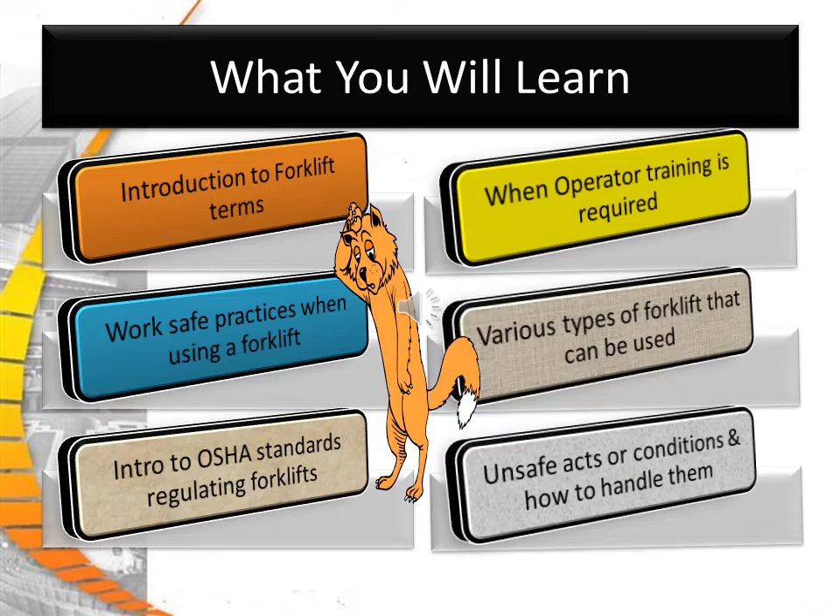Part 1, Introduction to Forklift Safety.

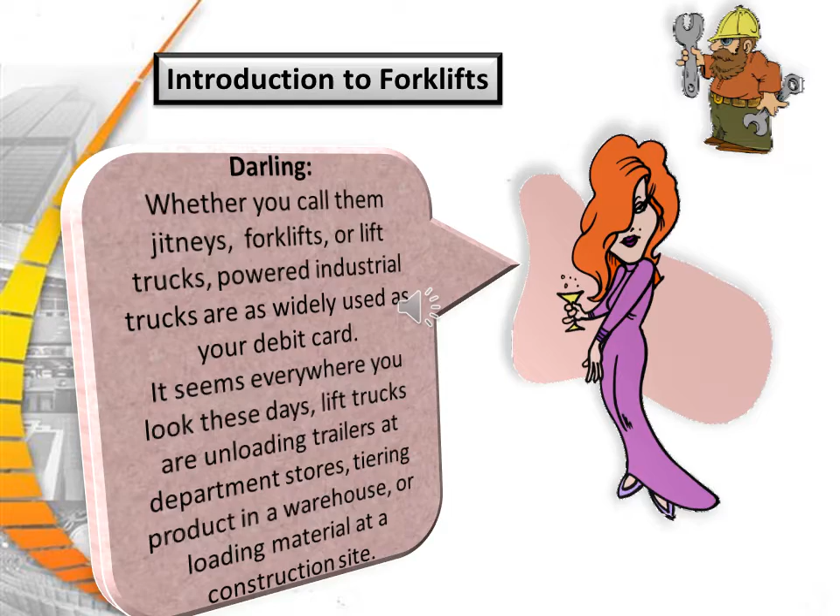Whether you want to call them jitneys, forklifts, lift trucks, or powered industrial trucks, they are as widely used as your debit card. It seems they're everywhere you look these days. Lift trucks are unloading trailers at department stores, tiering product at warehouses, or loading up material at construction sites. Powered industrial trucks are also moving lumber in a sawmill and dropping stock in a grocery store aisle. With well over 1 million trucks in operation today, the emphasis must be placed on both worker and pedestrian safety.

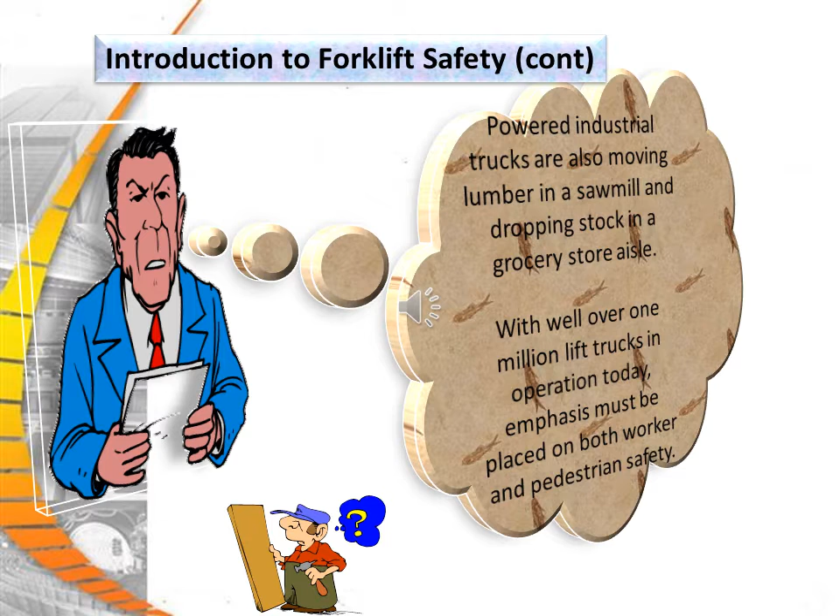This program will help you understand OSHA safety and health regulations governing these pieces of equipment, in addition to providing you with assistance in developing a training program for your lift truck operators, as well as other affected employees.

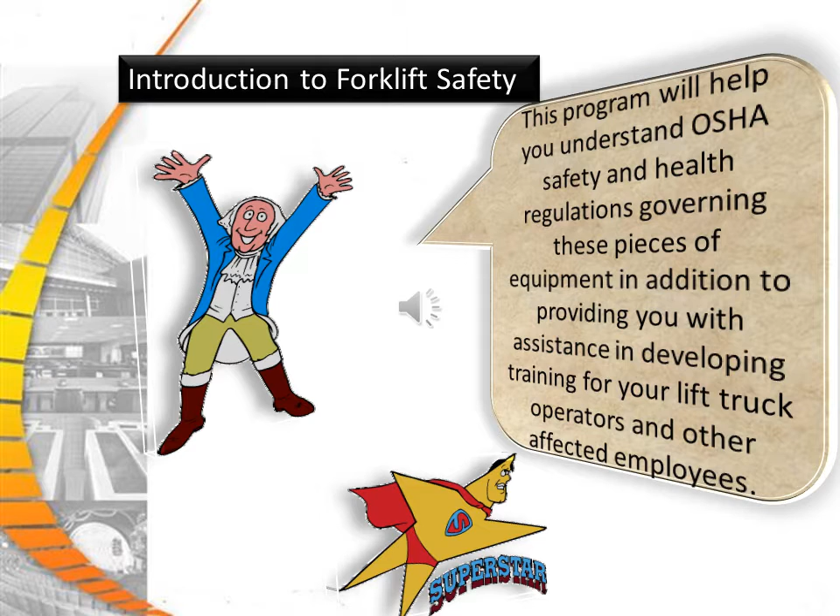What are the objectives of this program? Here they are: review OSHA Subpart N 29 CFR 1910.178 for powered industrial trucks, and discuss the fundamental safe work practices for the operation of powered industrial trucks.

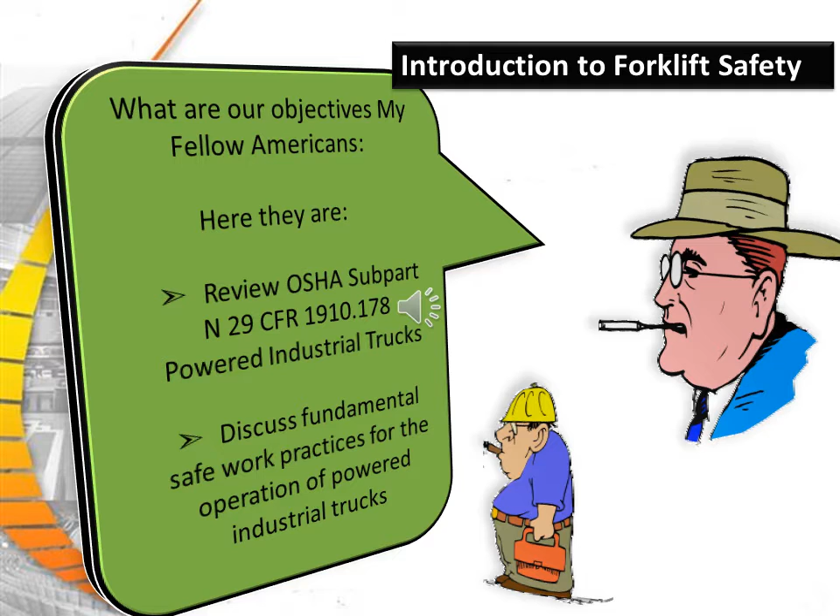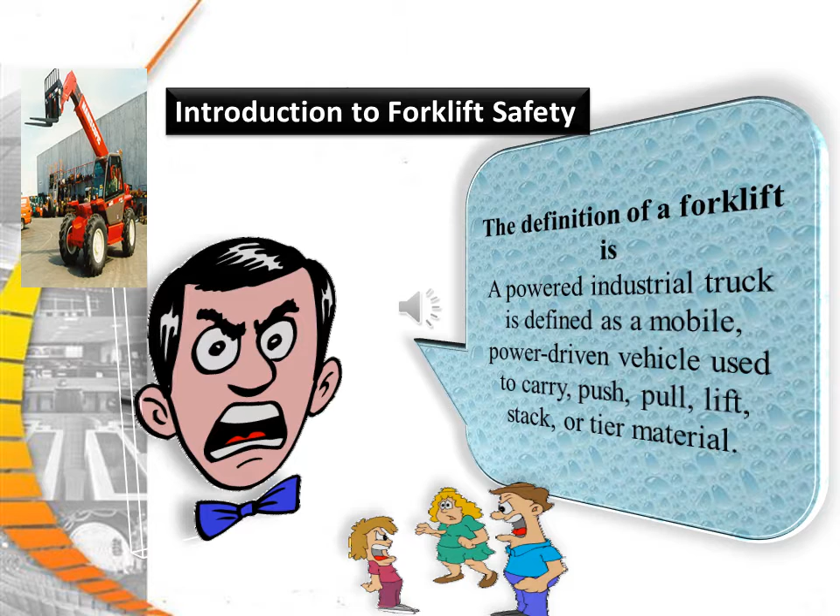The definition of a forklift is a powered industrial truck, a mobile, power-driven vehicle used to carry, push, pull, lift, stack, or tier material. Vehicles not covered by the powered industrial standard are compressed air or non-flammable compressed gas operated industrial trucks, farm vehicles, and vehicles intended primarily for earth moving or over-the-road hauling.

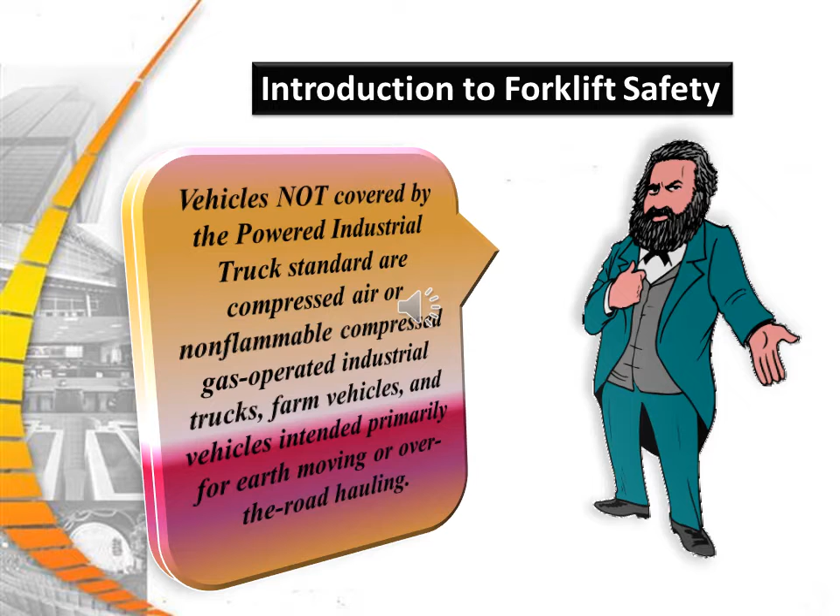Part 2, OSHA forklift requirements.

Design and construction of powered industrial trucks must be done in compliance with ANSI, the American National Standards Institute, B56.1. B56.1, 1993, is a safety standard for low-lift and high-lift trucks, and is in its latest revision.

All nameplates and markings must be in place and readable under the standard.

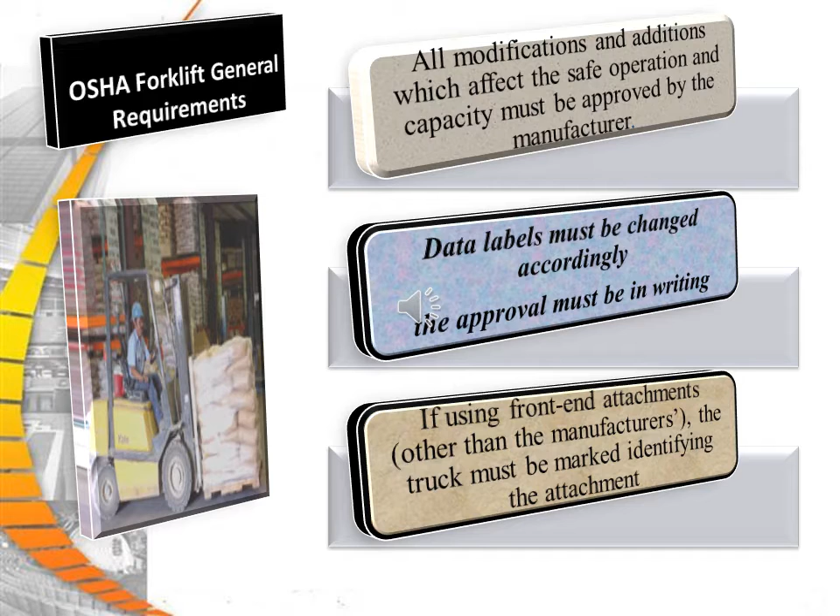All modifications and additions which affect the safe operation and capacity must be approved by the manufacturer. Data labels must be changed accordingly, and this approval must be in writing from the manufacturer. If using front-end attachments other than the manufacturer's, the truck must be marked identifying the attachment, listing the approximate combined weight of the truck and attachment at the maximum elevation with a centered load.

Most vertical mast forklifts are equipped with FOPS, falling object protective structures.

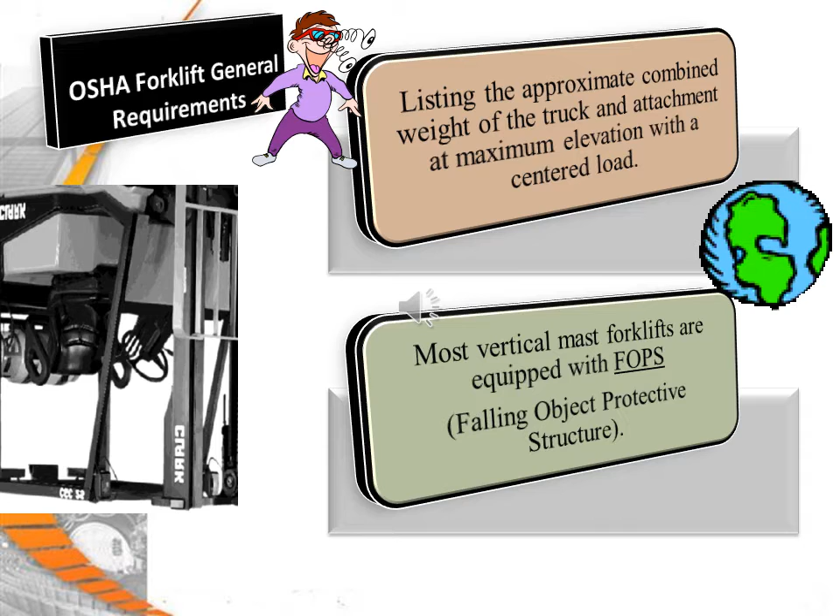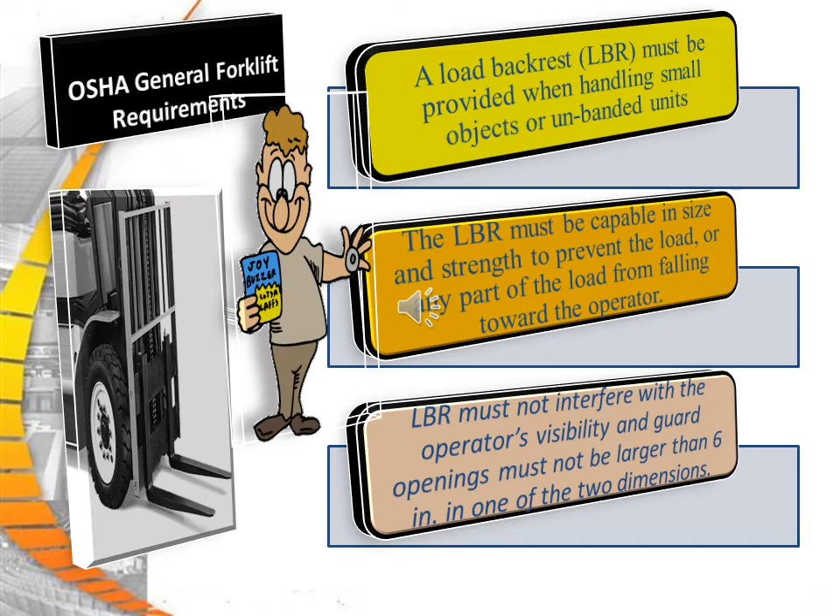A load backrest, or LBR, must be provided when handling small objects or unbanded units. The LBR must be capable in size and strength to prevent the load or any part of the load from falling toward the operator. The LBR must not interfere with the operator's visibility and guard openings, and must not be larger than 6 inches in either of the 2 dimensions.

Part 3, Forklift Safety and Stability Issues.

The lift truck is based on the principle of 2 weights balanced on opposite sides of a pivot point. The forward wheels are the fulcrum. This is the same principle used for the teeter-totter.

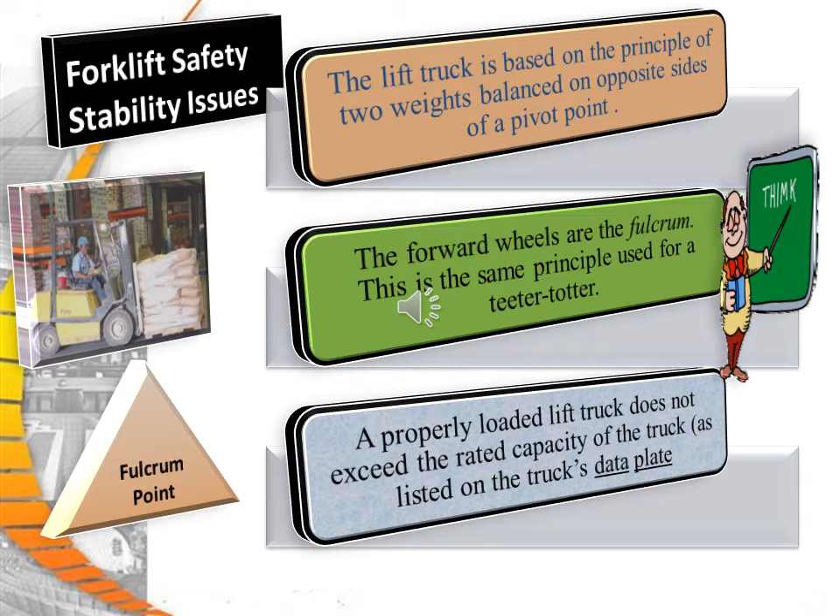A properly loaded lift truck does not exceed the rated capacity of the truck listed on the truck's data plate. The center of gravity, or CG, of any object is a single point about which the object is balanced in all directions. Every object has a CG.

The lift truck has moving parts and therefore has a CG that moves. The CG moves forward and back as the upright is tilted forward and back. And as you can see, the CG will move up and down as the upright moves up and down.

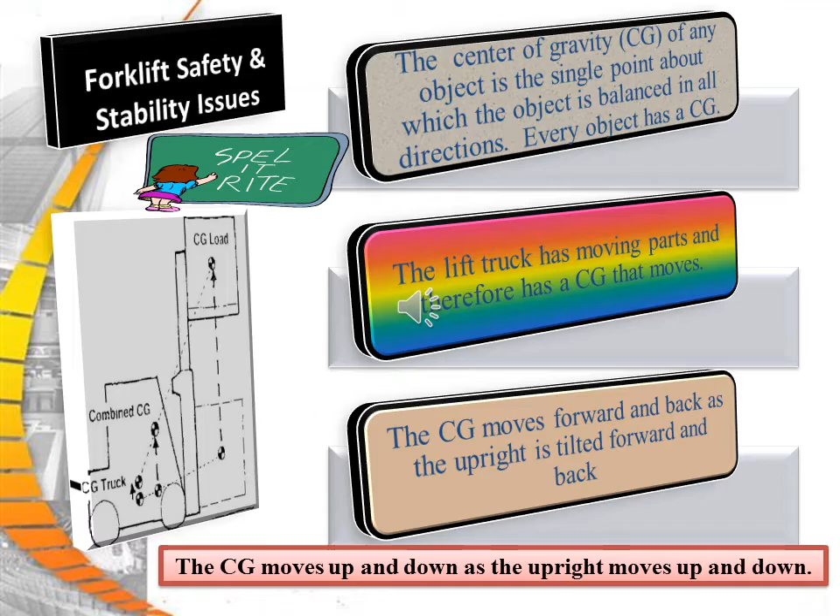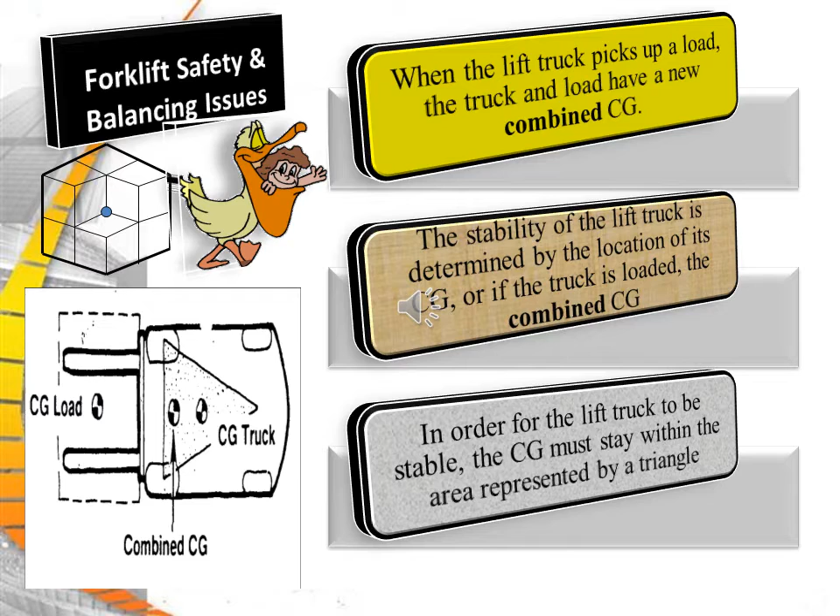A triangle is drawn between the drive wheels and the pivot of the steering axle. This triangle is routinely called the stability triangle. Think of riding a tricycle around corners - you lean forward and you will overturn as you move your CG to the nearest part of the triangle.

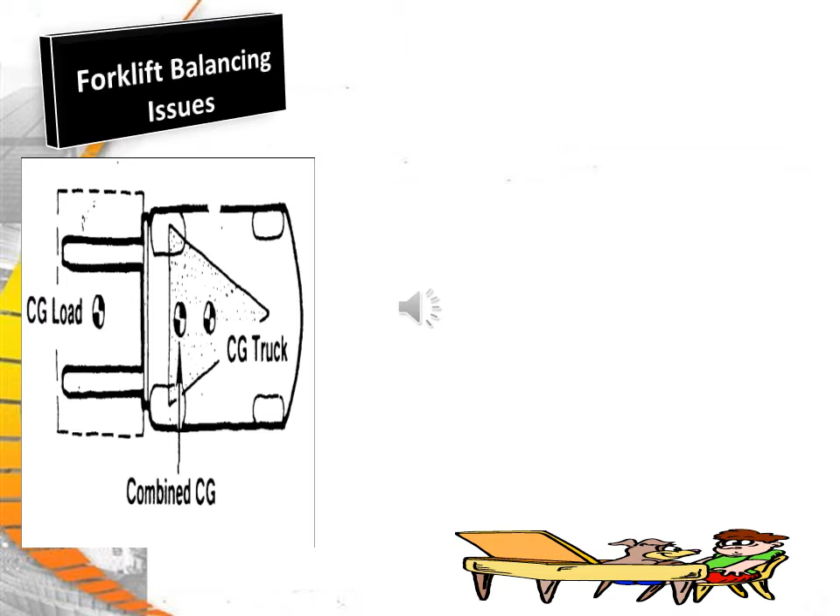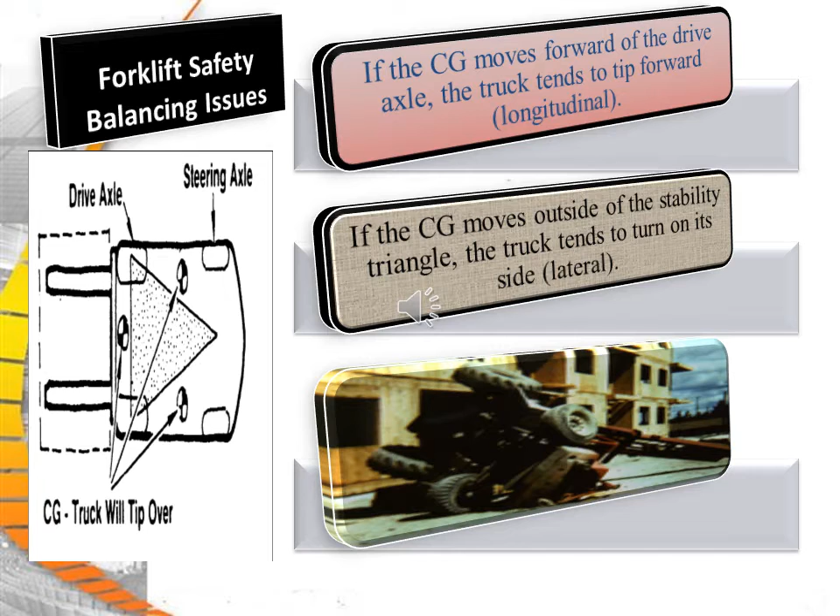If the CG moves forward of the drive axle, the truck tends to tip forward, longitudinally. If the CG moves outside the stability triangle, the truck tends to turn on its side, laterally.

The stability of the loaded truck is affected by a number of factors, including size, weight, shape, and position of the load, the height to which the load is elevated, the amount of forward or backward tilt, tire pressure, and dynamic forces created when the truck is moving. Those dynamic forces are caused by things like acceleration, braking, operating on uneven surfaces or inclines, or turning.

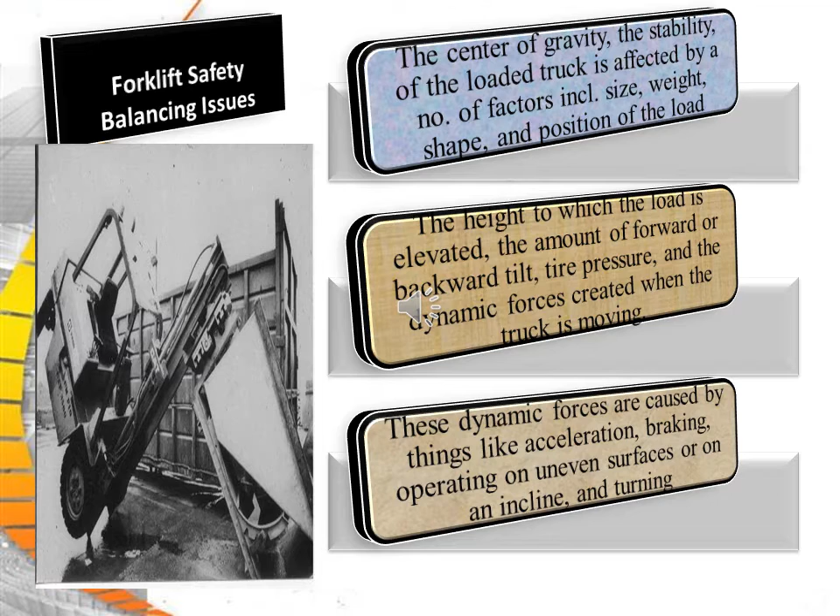These factors must be considered when traveling with an unloaded truck as well. An unloaded truck will tip over the side more easily than a loaded truck with its load in a lowered position. A recent test was done at a lift truck manufacturer's technical center involving a 5,000-pound capacity unloaded lift truck.

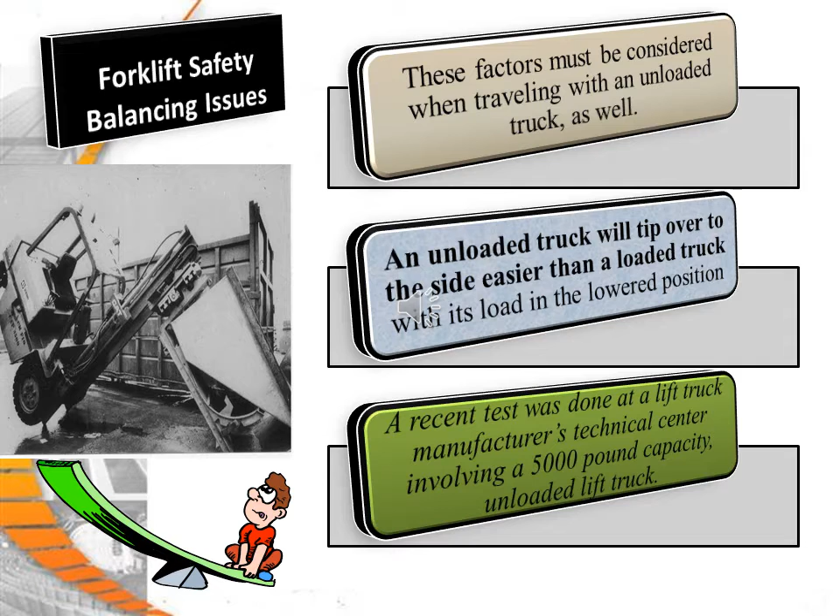In the test at the test center, the three-stage mast was fully extended and tilted back. One man was able to tip the truck over simply by grabbing and pulling the overhead guard.

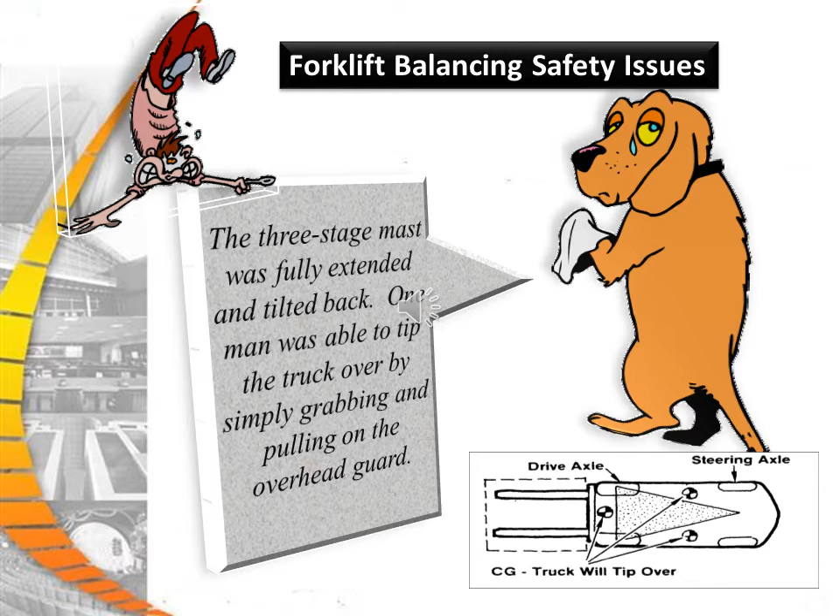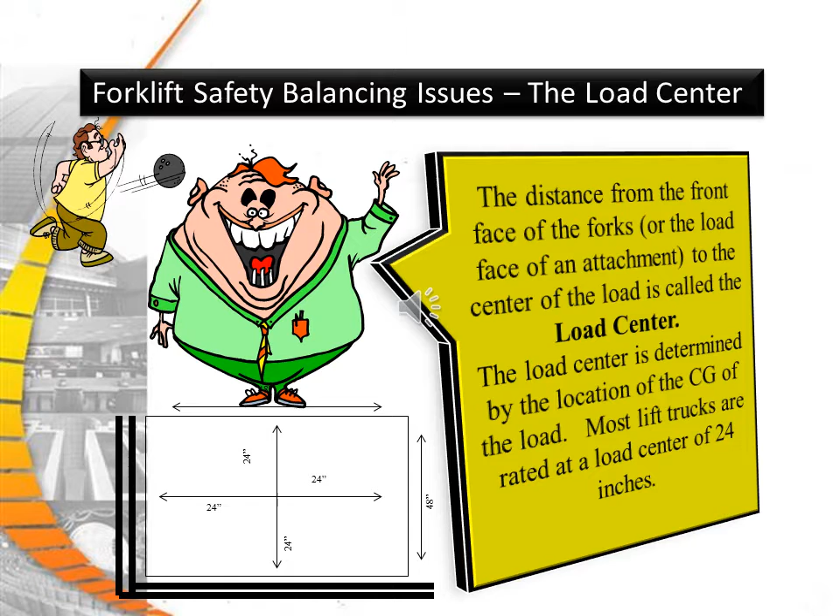The distance from the front face of the forks, or the load face of the attachment, to the center of the load is called the load center. The load center is determined by the location of the CG of the load. Most lift trucks are rated at a load center of 24 inches. When the load is carried a greater distance than the load center, the maximum capacity of the truck is exceeded. The use of special attachments instead of forks will also reduce the nominal capacity of the lift trucks.

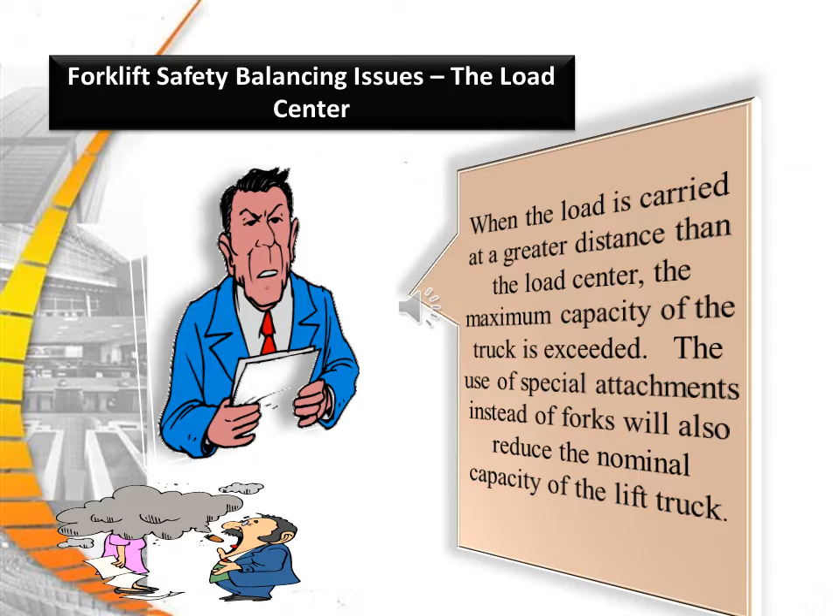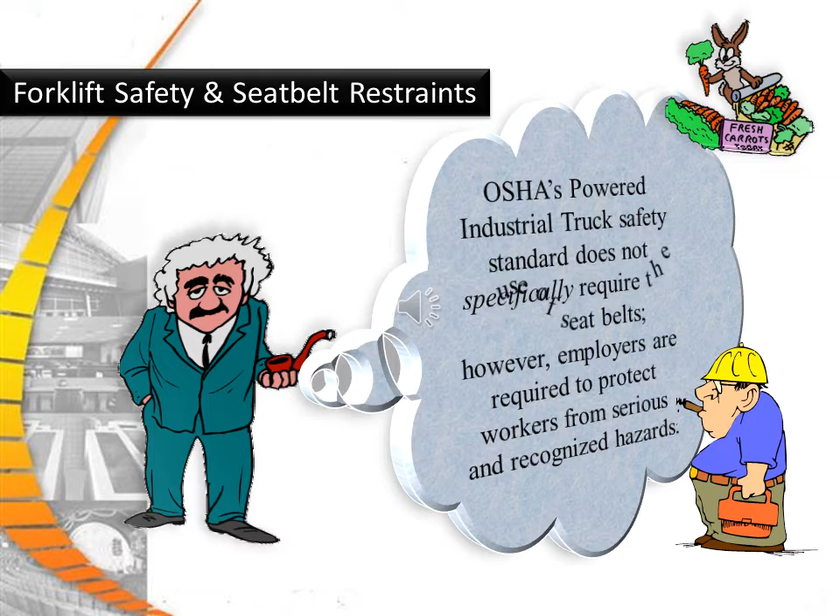The current version of the ASME B56.1, 1993, does contain provisions for operator restraint use. Furthermore, employers are expected to strictly adhere to the equipment manufacturer's recommendations. Most industrial truck manufacturers recommend the use of operator restraints and install operator restraint systems on new sit-down trucks. Depending upon the manufacturer, operator restraints normally include seat belts and side seat retention devices.

If your truck comes equipped with seat restraints, employees must use them when exposed to an overturn hazard or traveling in areas where an operator can be thrown from the operator's compartment.

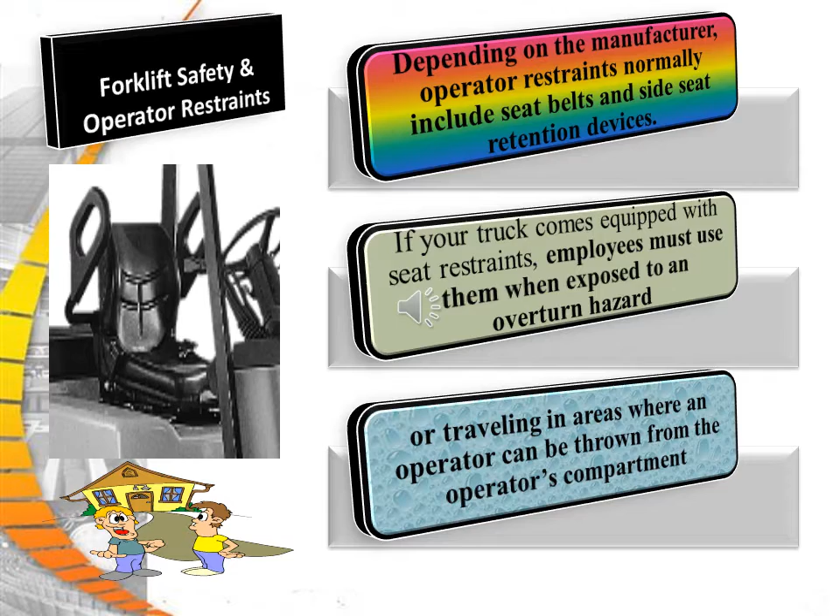If existing trucks are equipped with seat restraints, and your employees operate the trucks in areas where overturning or being thrown from the truck is possible, OSHA can cite employers for not requiring or enforcing seat restraint use when operators are exposed to hazardous areas where overturning or being thrown from a truck can occur.

In addition to evaluating contributing factors, the compliance officer will evaluate training and supervision to substantiate a citation. OSHA can also cite employers for not taking advantage of approved retrofit kits if those hazards exist. Competent operators should be able to recognize those hazardous areas or exposures where overturning or being thrown from a truck can exist.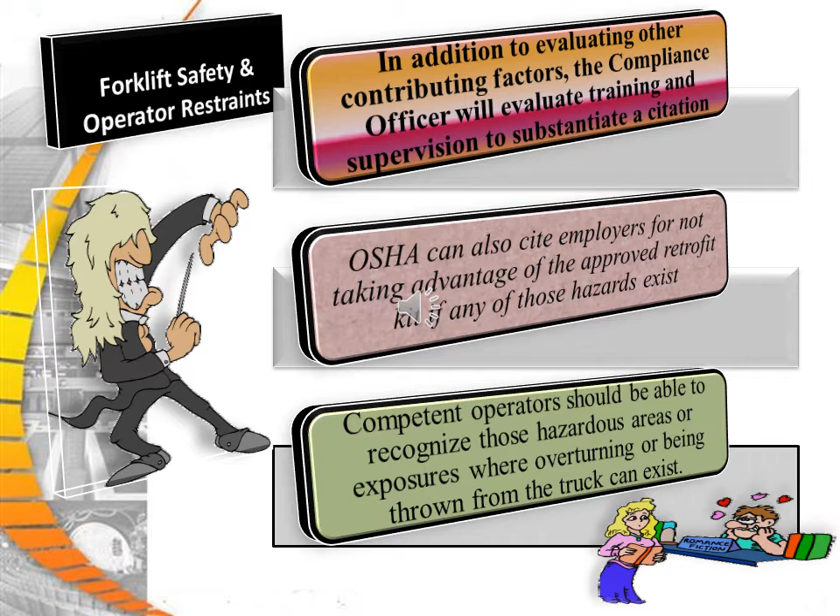Part 4. Forklift Safety Hazards.

A summary of OSHA's forklift safety hazards would have the physical hazards as speeding, loading docks, ramps or inclines, or other vehicle traffic. Defined traffic lanes or driving surfaces which would be rough or uneven. Tight areas, speed bumps, debris in a roadway, uneven tire pressure, or railroad tracks.

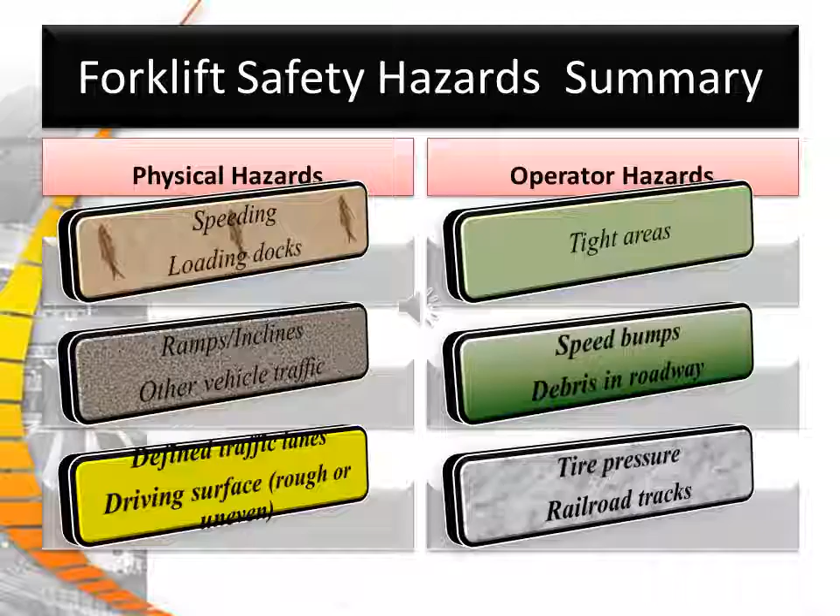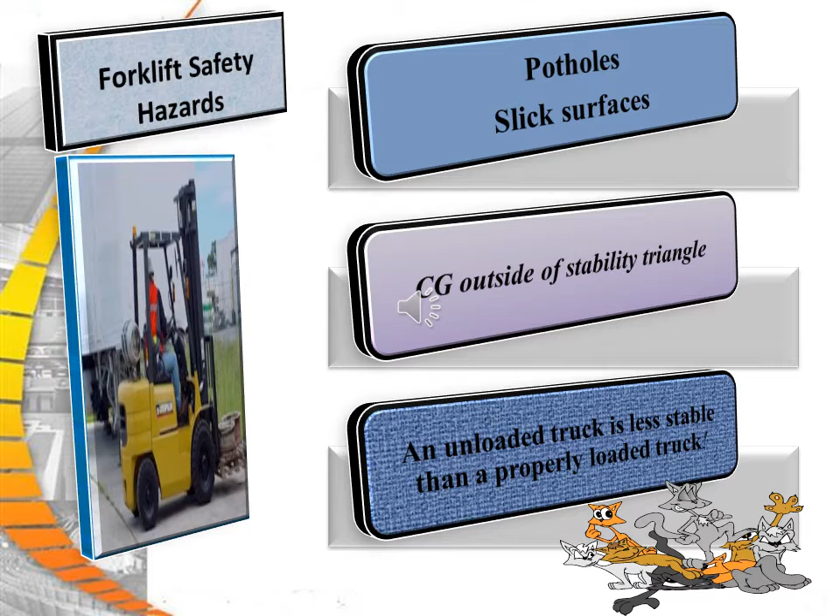Additional safety hazards include potholes, slick surfaces, a CG outside the stability triangle. An unloaded truck is less stable than a properly loaded truck.

Part 5. Maintenance issues on forklifts.

A summary of forklift maintenance issues includes defective or unadjusted brakes, a damaged mast chain, play in the steering, sparks from an exhaust truck, an inoperable horn, defective controls, a damaged chain anchor pin, worn tires or damaged rims, inoperable gauges, the forklift is not running well or missing, a dislodged defective counterweight, or a damaged overhead guard.

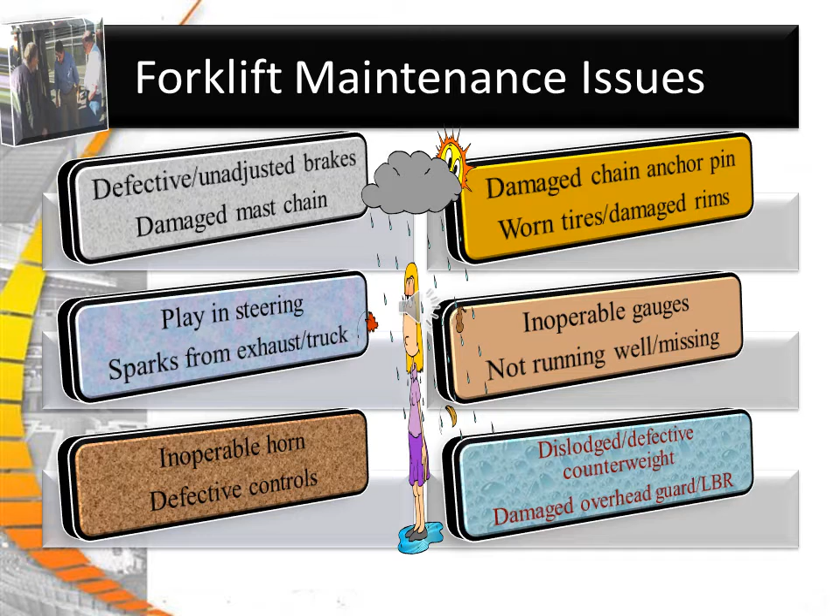Additional issues include wear defects in the forks or the carriage, cracks or defects in the mast or structure, a missing or non-legible data plate, evidence of leaks such as hydraulics or fuel.

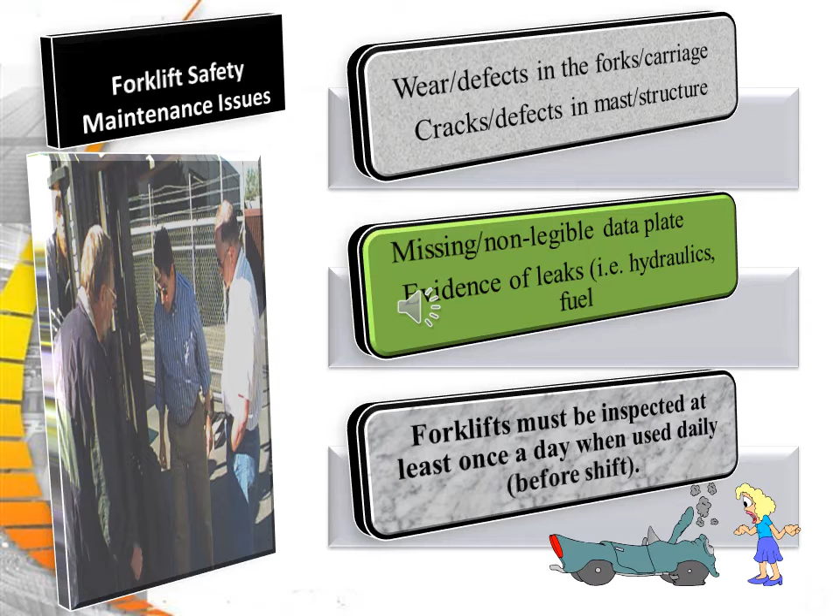The forklifts must be inspected at least once a day when used daily before the shift. Additional forklift safety maintenance issues include, when used around the clock, they must be inspected after each shift. The best practice would be before the shift and after each shift. Inspections should cover everything from the tips of the forks to the back of the counterweight.

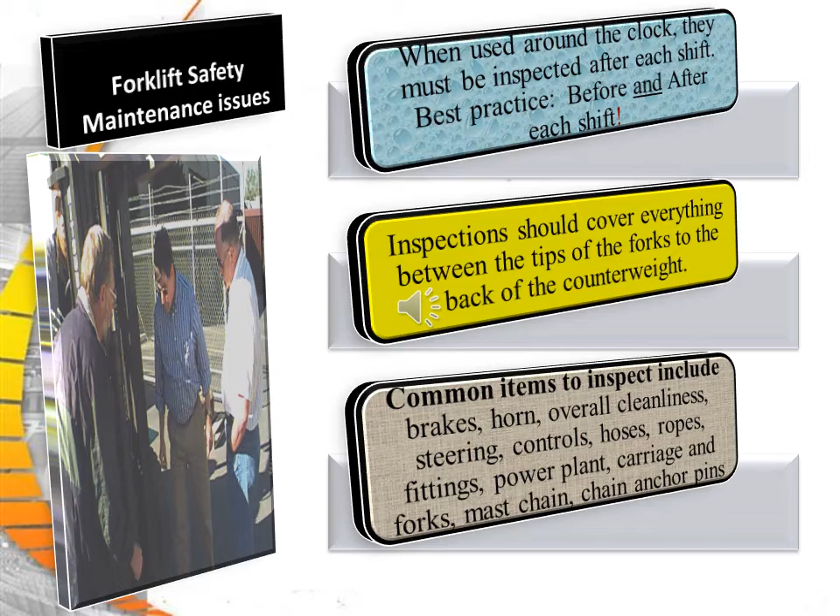Common items to include are the brakes, the horns, overall cleanliness, steering, controls, the hoses, the ropes, fittings, power plant, carriage, the forks, the mast chain, and the chain anchor pins.

Other maintenance items include the tires and rims, a counterweight, gauges and guarding, data plates, fluids, battery attachments. Replacement parts must be equivalent in safety to those that were used with the original design.

ASME B56.1 calls for a safety standard for low and high lift trucks, and this industry consensus standard is available online.

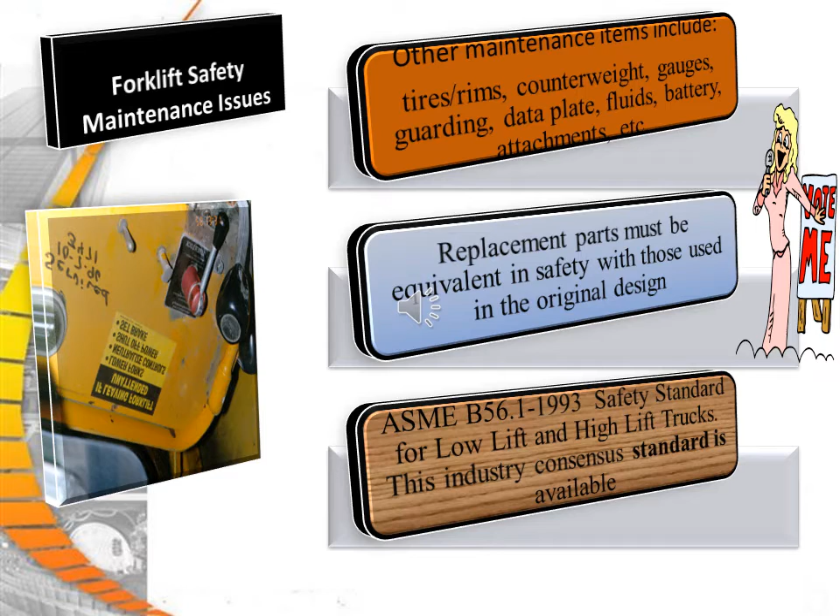Of course, your operator's manual should have the maintenance and inspection guidelines, and they're often in checklist form. They're also available online at osha.gov at the address provided.

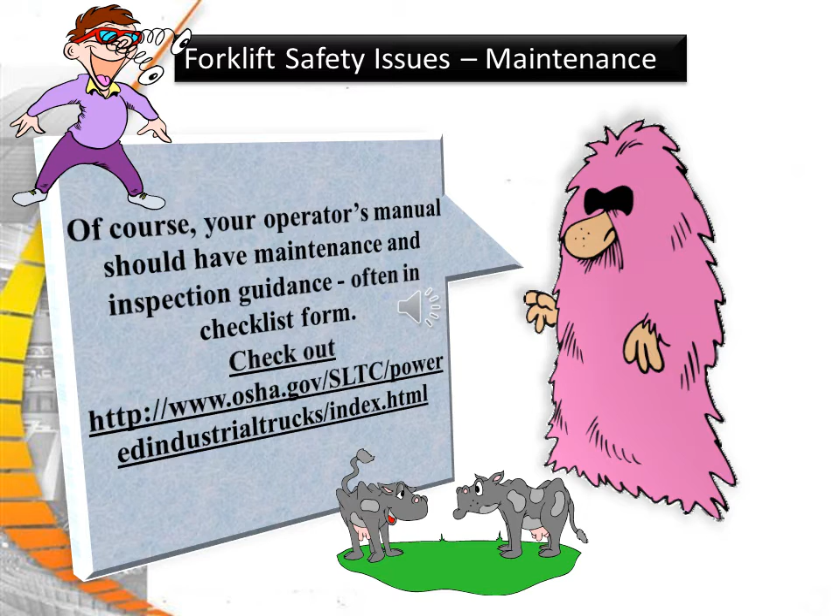Battery charging must be done in a designated area. It must be protected, the charging devices, from damage or collisions, and keep metal tools and objects away from uncovered batteries. You will provide adequate ventilation, use a hoist or other devices when handling batteries, and when charging and fueling, set the brakes.

Use a hoist or other device when handling batteries, and when charging or fueling, set the brakes. No open flames, sparks, or electric arcs. And of course, no smoking, and wear your personal protective equipment if needed.

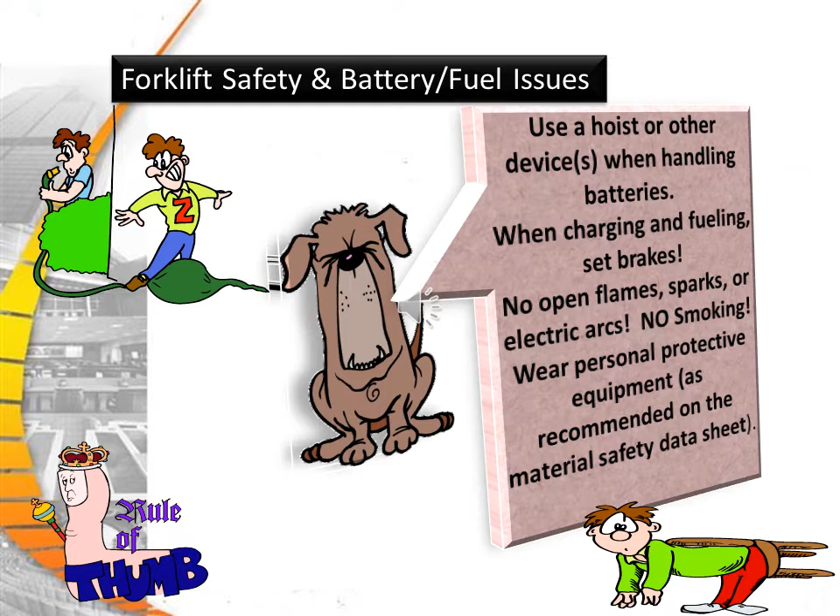In Florida, as well as other states, you must be licensed to make any repairs or modifications to an LP-powered truck or LP tank. Never overfill the propane tank, and check the certification date on the tank periodically to determine compliance.

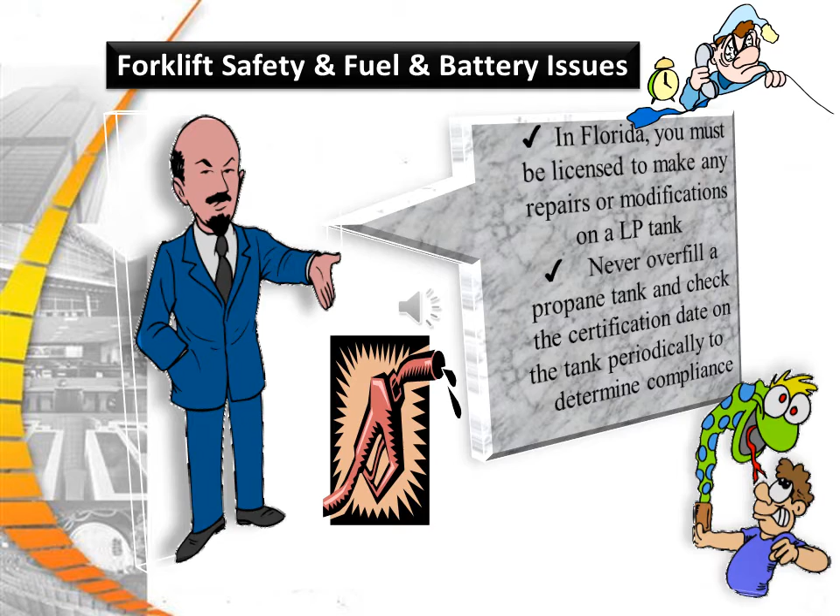Part 6. Matching the correct forklift with the work environment.

Only approved or designated powered industrial trucks can be used in flammable or explosive environments. The complete listing of approved trucks and the certain atmospheres they can be operated in are found in Subpart N, 29 CFR 1910.178(c), specifically Table N1.

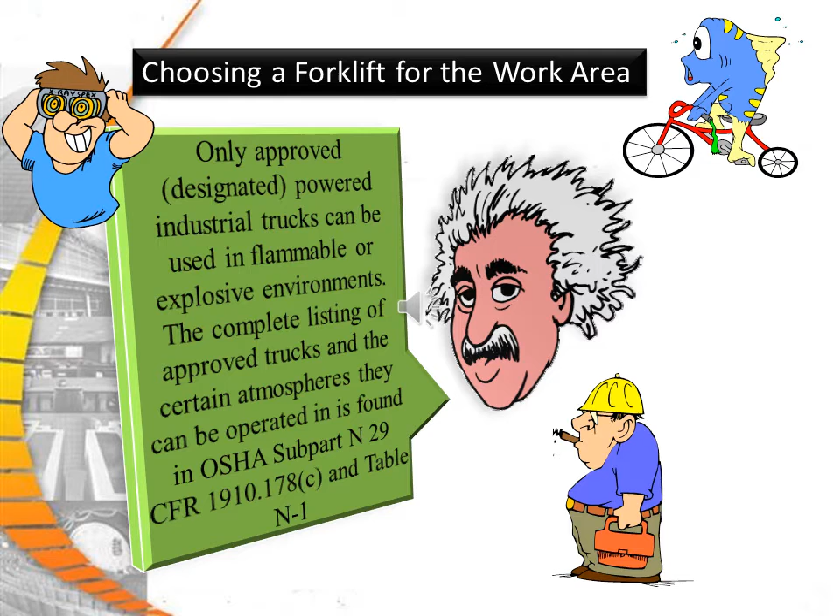As far as selecting the proper forklift for the right work environment, the D type of forklift is a diesel powered truck having minimum accepted safeguards against fire and explosion hazards. At the far end of the scale you have the EE, which is the electrically powered truck with safeguards of the ES truck, in addition to electric motors and all other electrical equipment completely enclosed. An ES truck is an electrically powered truck with safeguards to the electrical system to prevent the emission of hazardous sparks and to limit the surface temperatures. An E truck would be simply an electric truck having minimum accepted standards against fire or explosion hazards.

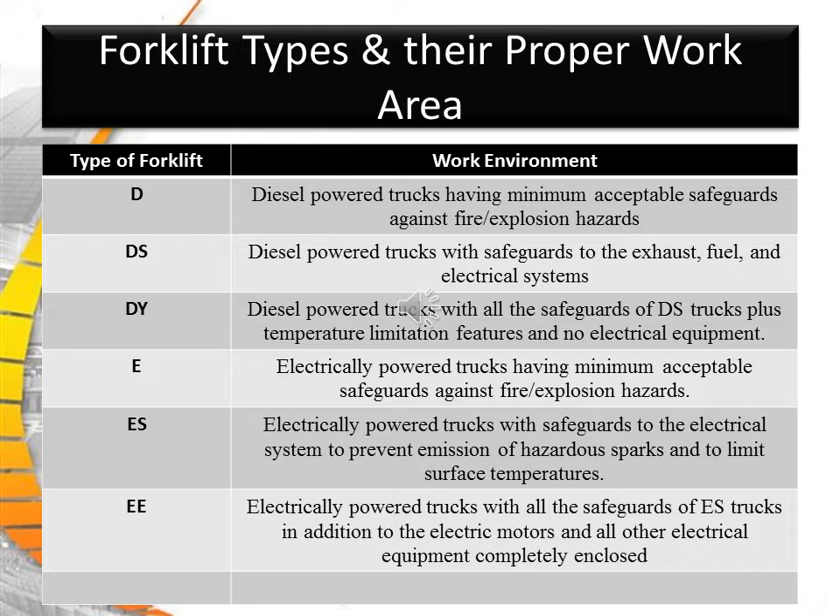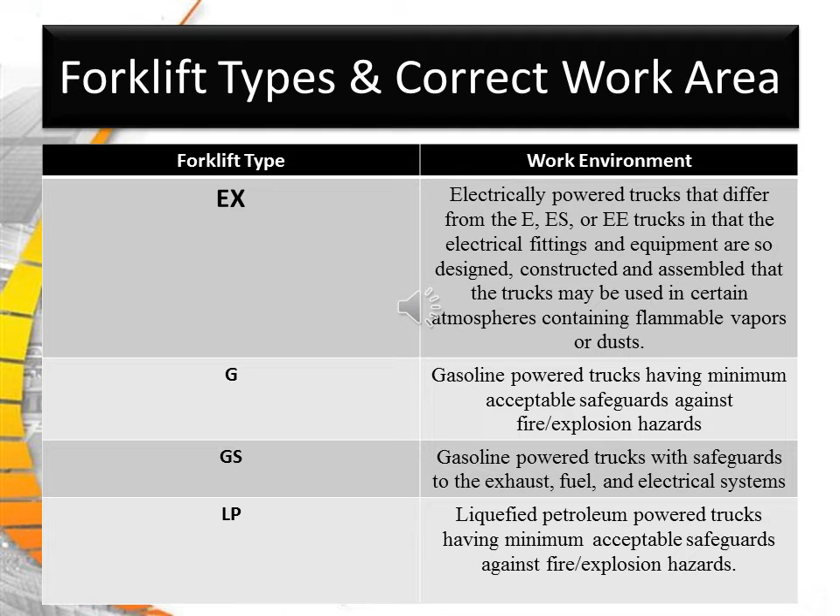Here we can see additional forklift types. The EX, which is the electrically powered truck, differs from E, ES, and EE trucks in that electric fittings and equipment are so designed, constructed, and assembled that the truck may be used in certain atmospheres containing flammable vapors or dust. A gasoline-powered truck will have the minimum accepted safeguards against fire or explosion hazards. A GS truck will have the gas-powered truck with safeguards to the exhaust, the fuel, and electrical systems. An LP truck will have the minimum accepted safeguards against fire explosion hazards. The LPS truck is a liquefied petroleum-powered truck with safeguards to the exhaust, the fuel, and electric systems. A CNG truck is simply a compressed natural gas-powered truck.

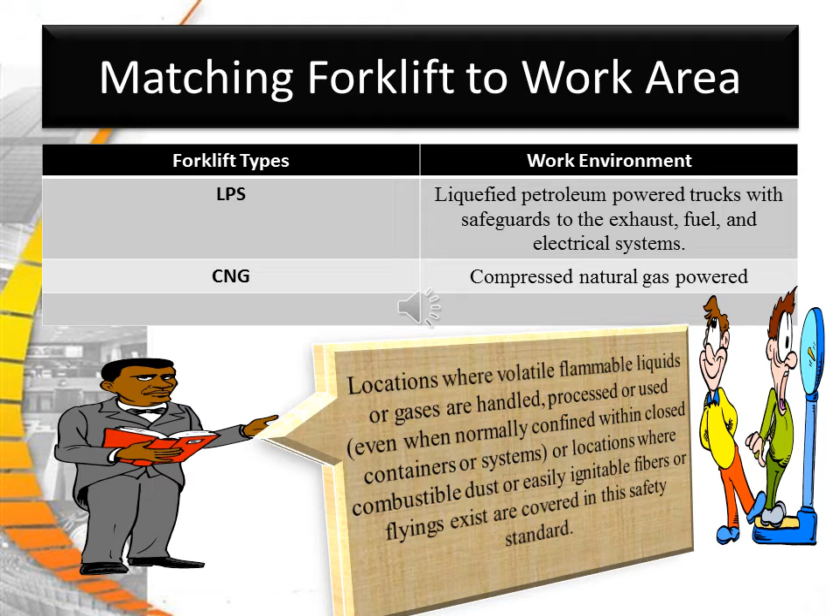Locations where volatile flammable liquids and gases are handled, processed, or used in confined containers or systems, or locations where combustible dusts or easily ignitable fibers and flyings are present, are covered under the safety standard.

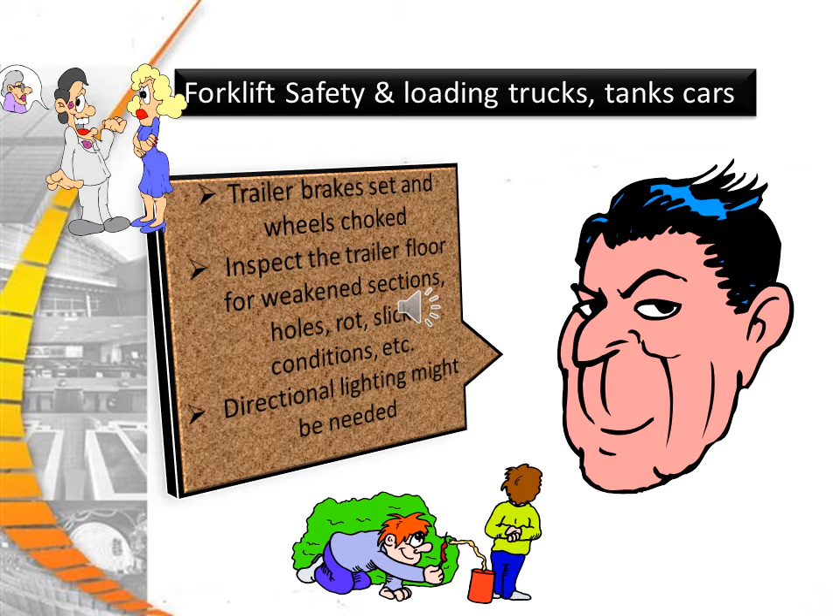Part 7. Loading trucks, tank cars, and trailers. Trailer brakes set and wheels chocked. Inspect the trailer floor for weakened sections, holes, rot, slick conditions, etc. Directional lighting also might be needed. Use fixed jack stands to support the trailer when not coupled with the tractor. National consensus standards allow powered industrial trucks equipped with specially designed devices to open and close railroad freight car doors.

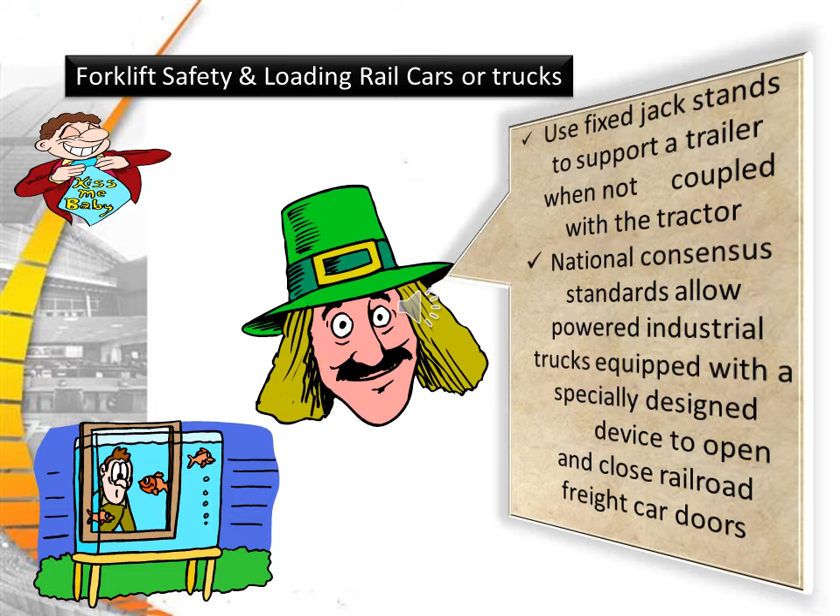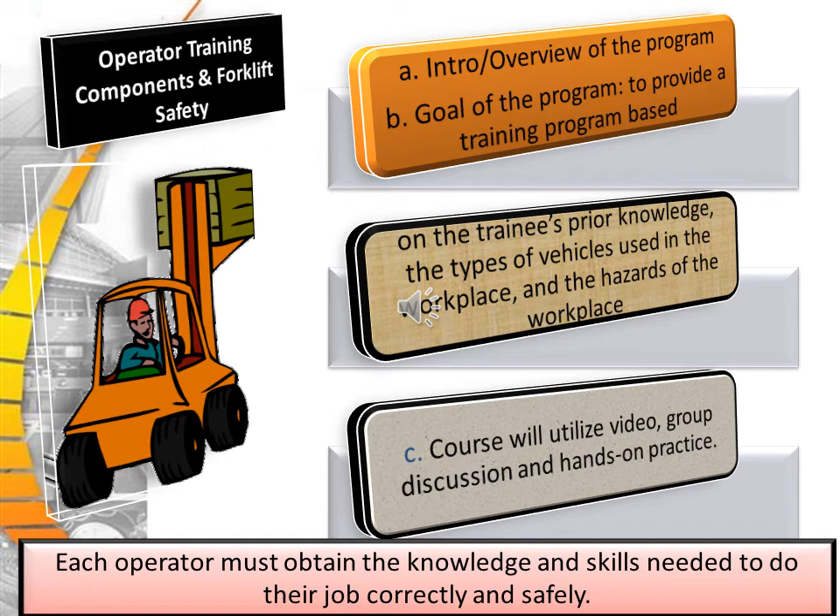Part 8. Operator Training Requirements. The first part in properly training an operator is to give them an introduction or overview of the training program, as well as indoctrinating them into the goals of the program about which they are about to undertake, with the trainee's prior knowledge of the types of vehicles used in the workplace and the hazards in the workplace. The course will utilize video, group discussion, and hands-on practice. Each operator must obtain the knowledge and skills needed to do the job safely and correctly.

Number 2. Types, features, and physics. Familiarize each operator with the basic types and functions of powered industrial trucks. Develop an understanding of the information shown on the data plate. Understand the critical truck dimensions that affect the safety of the truck. Understand the forces that cause tip-overs and truck design considerations, as well as safety ratings that prevent them, including the stability triangle.

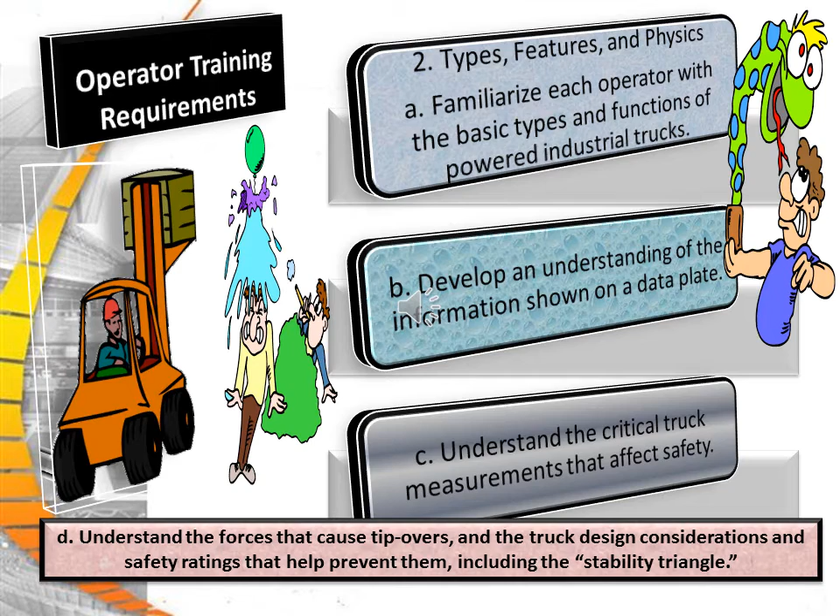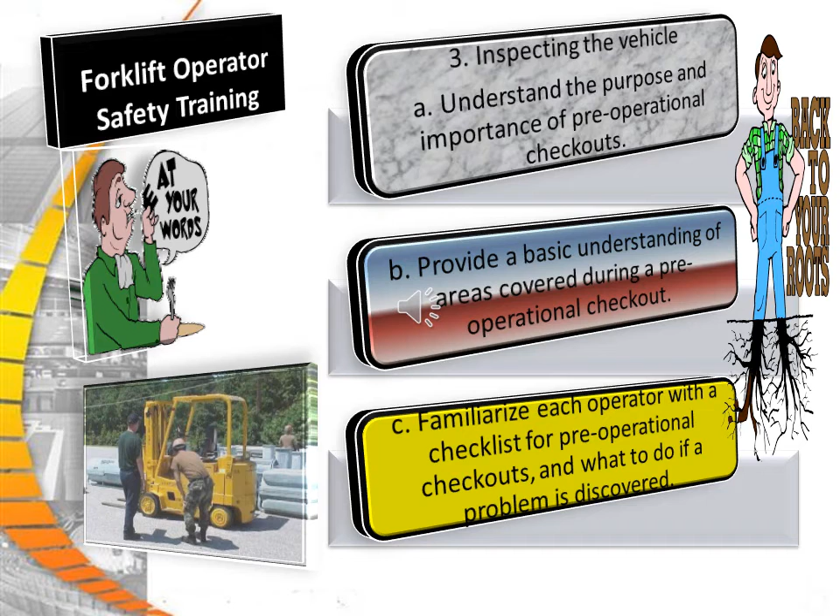Number 3 in training the operator correctly is inspecting the vehicle. Understanding the purpose and importance of pre-operational checkouts, providing a basic understanding of areas covered during pre-operational checkout. Familiarizing each operator with the checklist for pre-operational checkouts, and what to do if a problem is discovered.

Driving the truck and understanding the elements of safe movement of an electrically powered truck is important, along with understanding the differences between an automobile and a powered industrial truck. Recognize the safety hazards associated with operating a powered industrial truck.

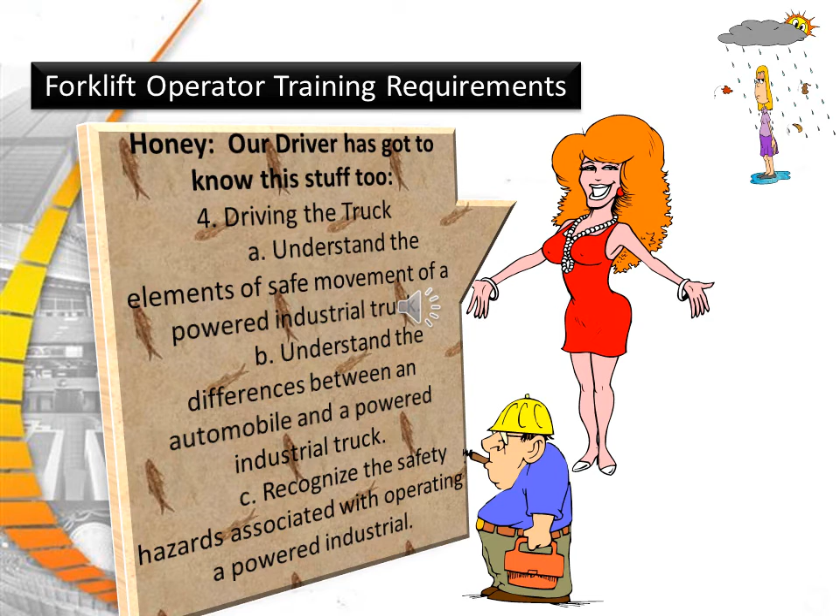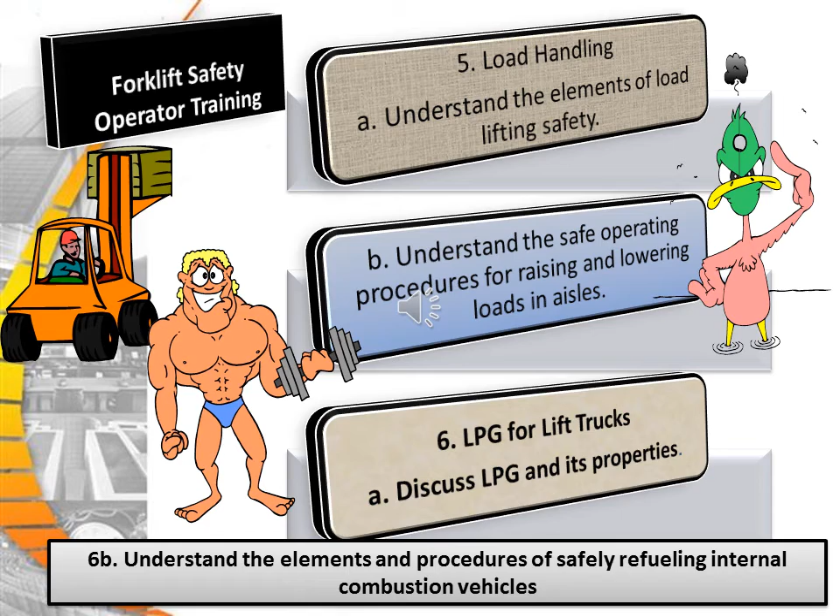Number 5 is load handling ability. Understand the elements of load lifting safety. Understand the safe operating procedures of raising and lowering a load in the aisles. Understand LPG for lift trucks. Discuss LPG and its properties. Understand the elements and procedures of safely refueling internal combustion vehicles.

Number 7, discuss LPG for lift trucks. Describe the tank components: the service valve, the surge valve, and the relief valve, as well as safety-related issues. Discuss the battery and the charging procedures. Understand the elements and procedures for safely changing and charging batteries, as well as filling procedures and maintenance. Discuss all safety-related issues.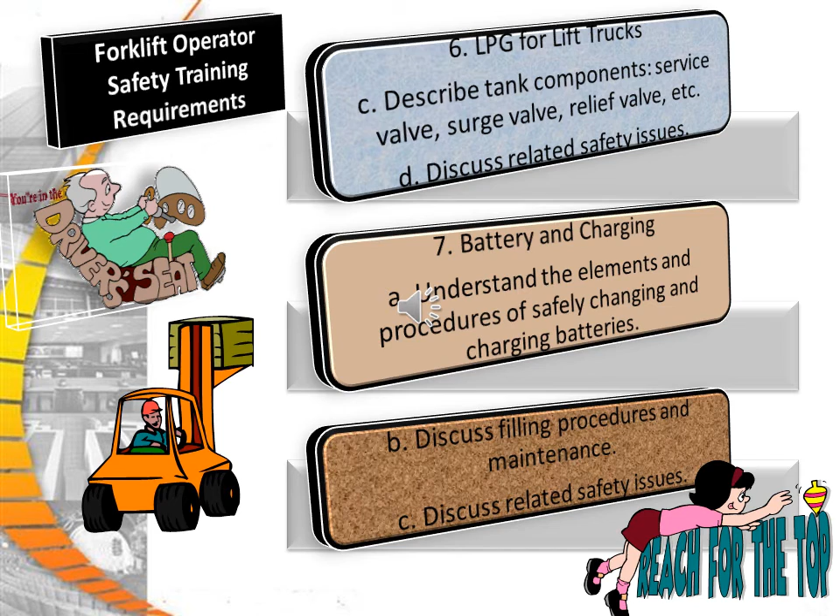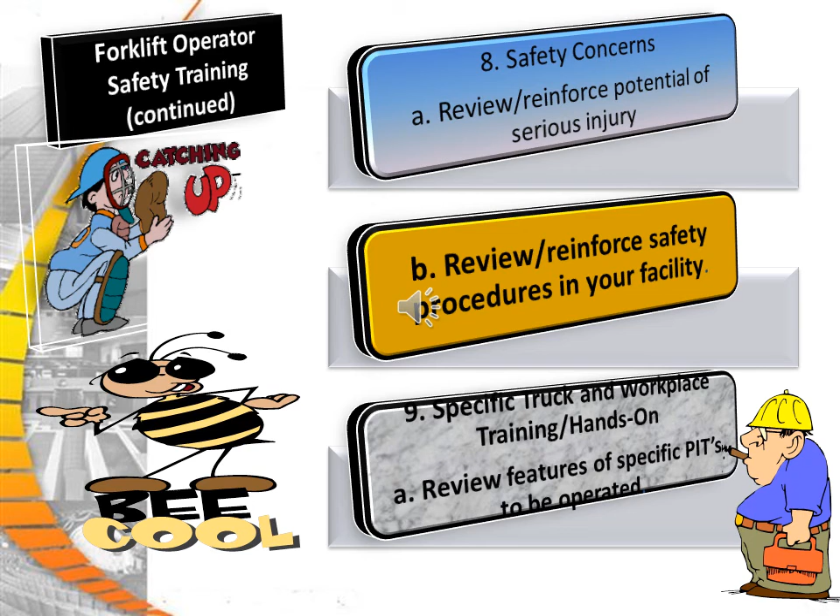Safety concerns. Review and reinforce the potential for serious injuries, as well as review and reinforce safety procedures for your specific facilities, as well as do the hands-on training for specific workplace situations, reviewing the features of a specific PIT to be operated.

Review operating procedures for specific PIT as well as safety concerns. Review the workplace conditions and safety concerns, learning and practicing actual operation of specific PITs and specific workplace conditions while demonstrating proficiency in performing powered industrial truck duties.

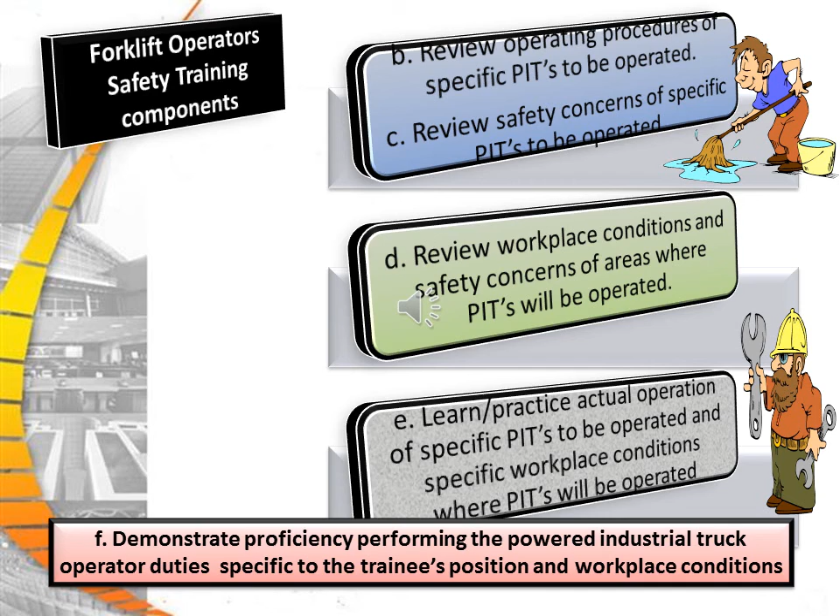Lastly but not least, issue the operator a certificate of completion, good for 3 years.

Forklift Safety Summary. Begin by identifying all potential users for operator training. Identify all potential workplace hazards. Clearly enunciate company policy for forklift use in the workplace. Obtain a copy of the manufacturer's operating manual. When handling flammables, use NFPA controls, and match the right forklift for the right workplace.